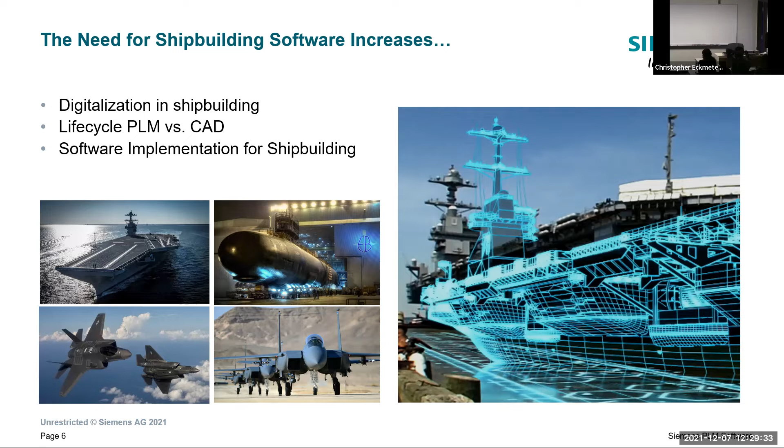So when we talk about digitalization and what's changed, as we moved from a computer-aided design world into life cycle digitalization, the amount of data, and you see it every day, the amount of data available to you and that exists around the things that you use every day has grown exponentially beyond comprehension. So your car is collecting data, your phone is collecting data about you. Everything you do now is collected as data that's in the cloud somewhere and available to process. You have to know what you're looking for and you have to know what to do with it.

So that's where digitalization comes in for shipbuilders and for the Navy and for our other Department of Defense customers. That's what they're looking for, an intelligent way to collect and analyze that data so they know what to do with it and can make good decisions.

So starting with the basics of how we approach this process for shipbuilding specifically. What I pointed out earlier is the benefit of a naval architecture view of the world: the degree you get crosses disciplines, it crosses every aspect of engineering. Everything you can do in engineering is covered in naval architecture, which is the interesting thing about it. You can kind of go in any direction and you're prepared for anything coming out of those doors.

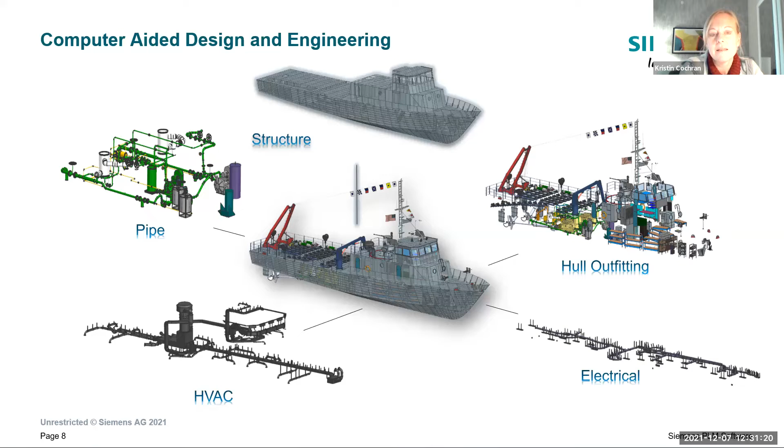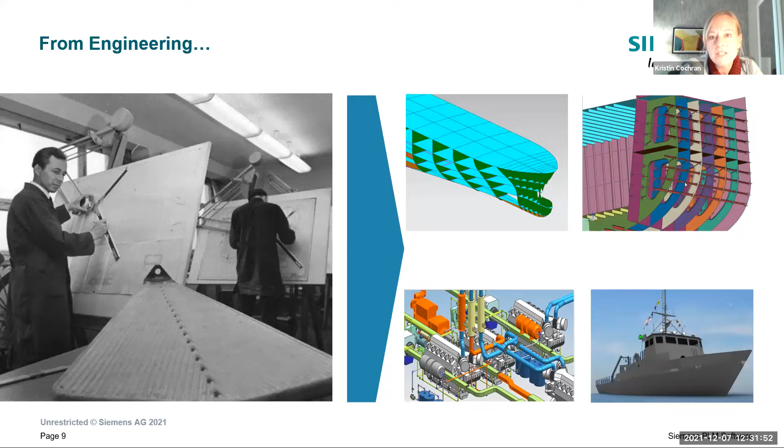But if we start with just looking at the shipbuilding process and design process that we go through, we start with some basic modeling and design and bringing together the discipline and systems into a ship design. And that starts with just the general engineering process that used to be done on a drafting board and now is done in a computer system, a software application. Everything from the shell expansion, the scantling drawings, all the hydrodynamic, hydrostatic calculations, all that's done by computer digitally now. All the design for the systems, model-based systems engineering, all that is done using those basic design capabilities.

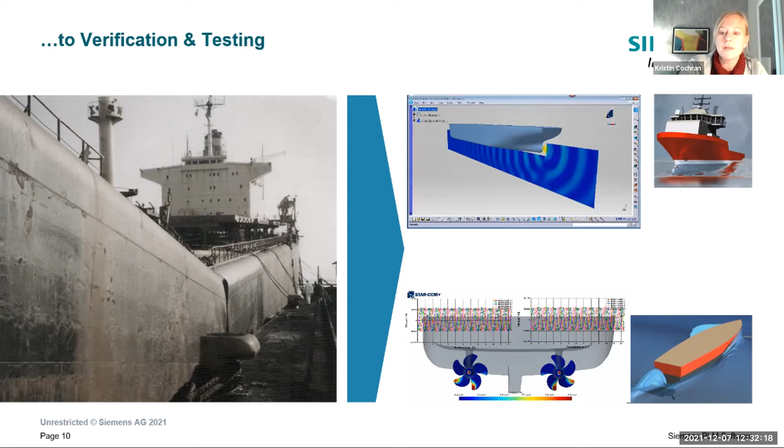And what that allows you to do, having those models, is give you the ability to simulate and assess before you ever build or model or do any kind of tank testing. You can simulate all that via digital technology now, and verify that your design is optimized the way you want it to be. And again, you're optimizing, you're simulating, you're bringing together your design to not only consider the ship you're building now, but the class of ships, and also taking information from the ship that's at sea now off of sensors and Internet of Things type technology that feeds analysis data back into the design process so that you can make design changes for future ships.

And you'll see some of the industry needs driving that now. Business drivers are things like sustainability, environmental regulations and considerations. A lot of the ships that are already at sea are going to have to be modified to take into account the changes occurring now. So you feed the information from the ships you're sustaining back into the design cycle. You want to capture all that into your product models.

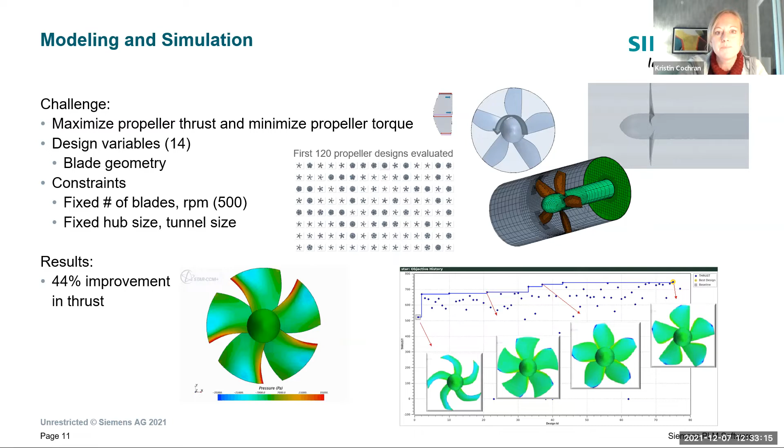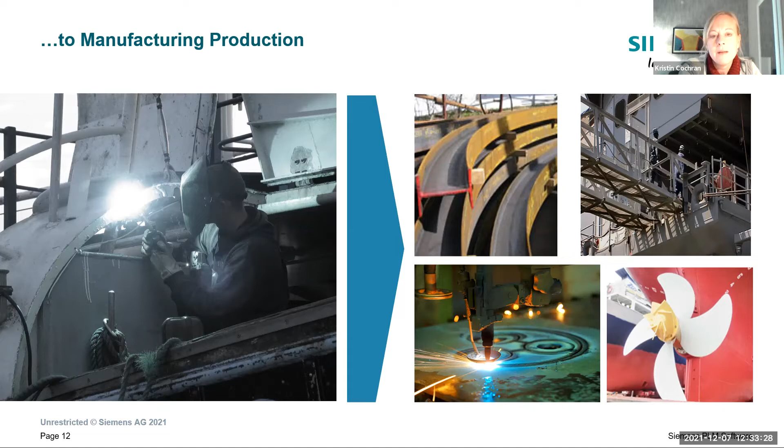So once you've got your design ready, your detailed design, your engineering process is starting to come to completion, then you start thinking about manufacturing and how to break that ship down into how it's going to be built and assembled in production planning. And this is where we kind of have two totally different perspectives: the Navy shipbuilding world versus the commercial shipbuilding world. Shipbuilding in Europe and commercially is very much focused on automation, robotics, designing ships that can be manufactured with as few humans as possible, trying to reduce cost and get the ships done as efficiently and quickly as possible.

And what that means is in a place like Italy, where a cruise shipbuilder may have 10 shipyards at their disposal, you design a block of a ship to perform a certain way once it's built, but that block could be built in any one of the 10 shipyards, all of which may have different crane capabilities, different welding techniques, and different types of production capabilities. So even though the block may be designed to its as-built condition, you have to consider the manufacturing processes that could be done in any one of those places based on schedule or availability and capacity within those yards. So it means producing different deliverables, different outputs, depending on where that ship is going to be built and assembled. So the production process gets pretty complicated, and a lot of analytic algorithms go into calculating the best way to build the ship. Again, all done digitally.

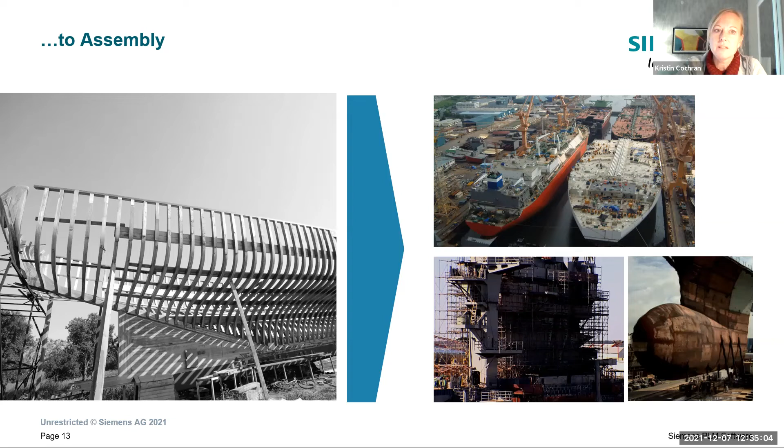So then if you extend that ship into its life cycle, where now the owner operator takes control of the ship, whether that's a cruise ship operator or the Navy, they want data collected off the ship. They want to know the state it's in. They want to be able to update the model with changes that are made along the way, do inspections, and more importantly, do predictive analytics and maintenance planning so they can understand when a part is going to break, when something's going to wear out, and then schedule that maintenance in advance so they can get the ship in and out as quickly as possible. And this is currently a big topic. If you guys are familiar with the U.S.

Navy's infrastructure and optimization work that they're doing, they're revamping the public shipyards and trying to reduce the amount of time a ship or a submarine is in port getting repairs. So, increasing the operational availability, we call it.

So we want to know as much as we can about what repairs the ship is going to need, so that we can plan those availabilities when they come into the shipyard and get them out much more quickly and back into the fleet, so that they're actually out doing the work they're supposed to be doing. So as much as we can, we pull the data off the ship, put it back into the model process, and really make it easier to capture all that digitally and make a decision.

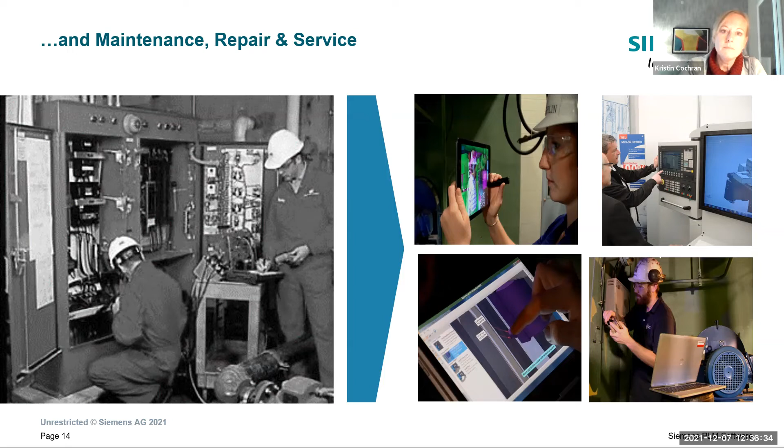So we see the complexity increasing both within the military applications and also commercially, as the requirements change, and the commercial world is going to have to adapt to new requirements very quickly. On the Navy side of things, they have to do more work with a smaller fleet and really increase the amount of time a ship is at sea. So that means having as much data available at hand for as long as that life cycle as we can.

So if you look at the Ford-class aircraft carrier that's being built right now at Newport News, those are 3D modeled ships that they're able to produce without drawings. So all the production process is happening now with electronic work instructions that are telling the workers what to do without having to interpret the jobs off a drawing.

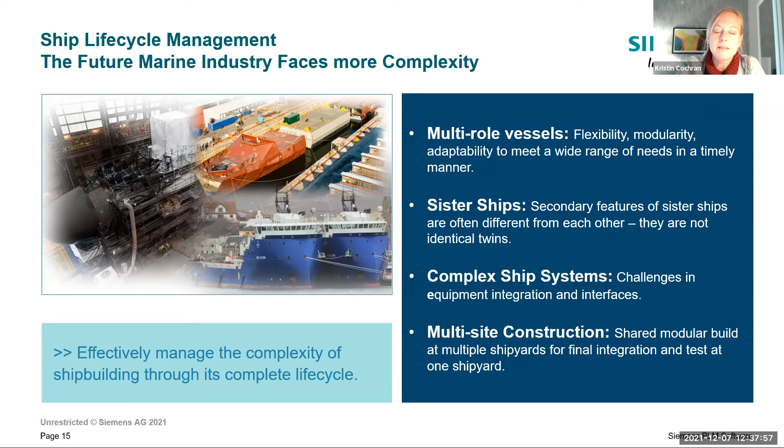So there's a lot of changes coming in terms of both the requirements for digitalization, but also with the data available to a much younger workforce who isn't schooled for decades in the process of reading and interpreting drawings. So a lot is changing, and will continue to change as more of this data and digitalization is available to the yards.

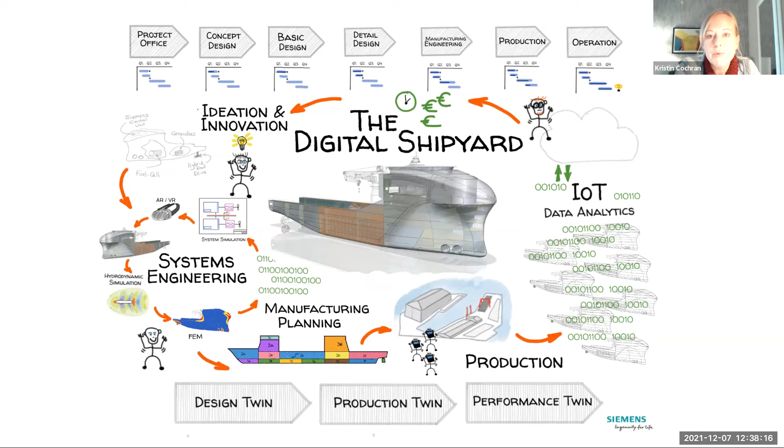So when we think about the digital shipyard and that life cycle that is processed from the acquisition process and contracts and requirements all the way down to what gets handed over to the owner operator as production deliverables, we have to capture all that data in a single place, which we call the product lifecycle management backbone. So for us, that's really the transition away from just the 3D CAD model into capturing every bit of data across the life cycle of a ship all in one place.

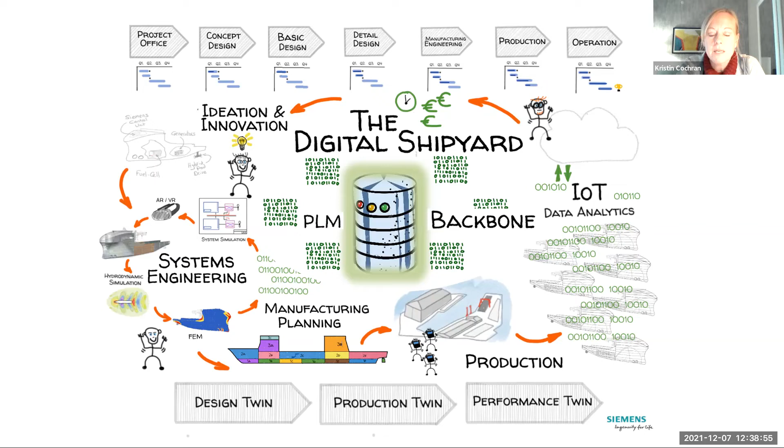So that can be anything from simulation data to potential analytics data that you're pulling off a sensor as the ship's at sea, that everything needs to be stored in one place in order to really make good decisions and keep track of everything. So you'll hear the term digital twin, digital thread. So those are kind of the latest buzzwords.

But what they mean is a digital thread, it captures information about a ship throughout its life cycle. It's not really a snapshot in time of data along the way. It's actually gathering all of that data together in one place. So your ship is going to look different as designed and as built and at sea, because 20 years into sailing at sea, you're going to be having a lot of changes made that make it look quite different than how it was designed.

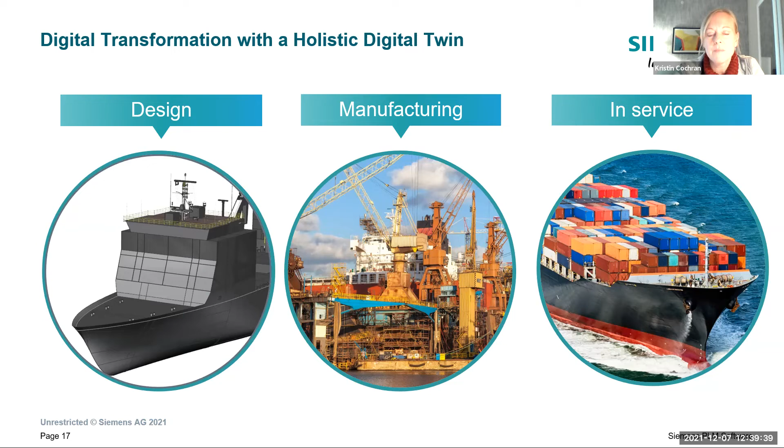Especially when you think about swapping out weapon systems, crew capability and needs, things that change over the life cycle of a ship make it look a lot different than when it was built and delivered in the first place. So capturing all of that information in one place is what drives a digital twin and gives you the complete picture of that ship's entire life. And by the way, extending not just to a ship, but to a class of ships, which all have variations in slightly different designs.

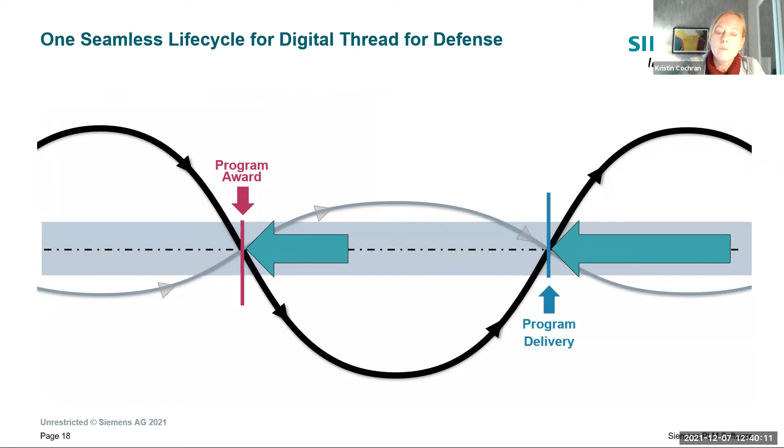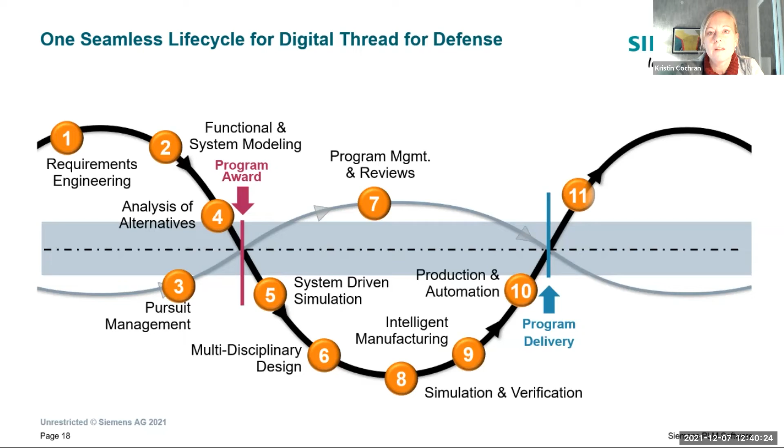So when you hear the term digital thread, what that means for us is that digital twin, and then the processes and data that are applied to that digital twin along the path of its life cycle. So what this life cycle is showing you is how the data kind of transfers across each process that occurs, but also different parties are going to be interested in different parts of this thread.

So for example, if you're building a ship for the Navy, upfront on the acquisition side of things, the Navy is defining the requirements. The Navy's looking at design alternatives. They're assessing weapon system requirements. They're assessing what they need to acquire and setting the requirements for an OEM that's going to actually build the ship.

So the OEM is responsible for the design process and driving out the data to meet those requirements. But then in the end, that same product is going to be handed back over to the Navy to run it, operate it and maintain it for the life cycle. So that same information gets passed back and forth between the Navy and the OEM at different points along the way. And in the meantime, everyone's looking at the same view of the data along the life cycle too. So it's all in one place. And that's where that PLM backbone comes in.

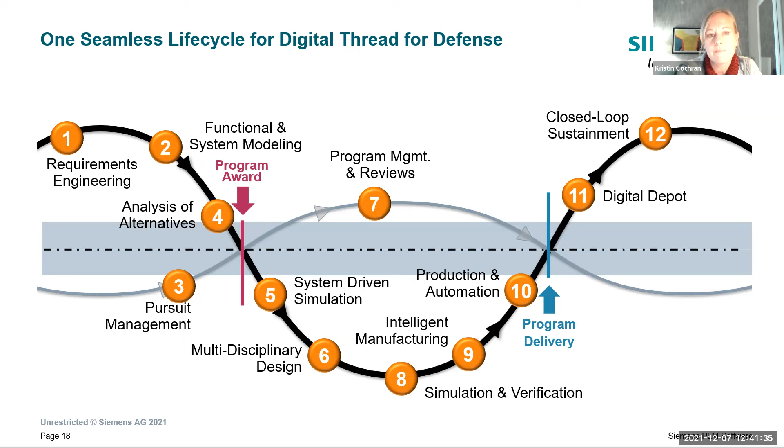So talking a little bit about requirements, because I think this is a particular area that's changing rapidly because of new considerations and regulations that are required for ships that are going out to sea now commercially. There's a lot more emphasis on requirements verification and validation upfront in the design process, and just ensuring that requirements continue to be met. And as requirements are changing, that information is getting driven back in to identify potential changes that may be needed. So a lot of focus on capturing requirements upfront and then validating to those requirements as you go.

So where we see the PLM system sitting, and here again, I'm differentiating between the CAD design, which is like the 3D model of the ship, versus the backbone of information that kind of surrounds that model and is going to be used to sustain that life cycle. And the product lifecycle management is where you capture effectivity.

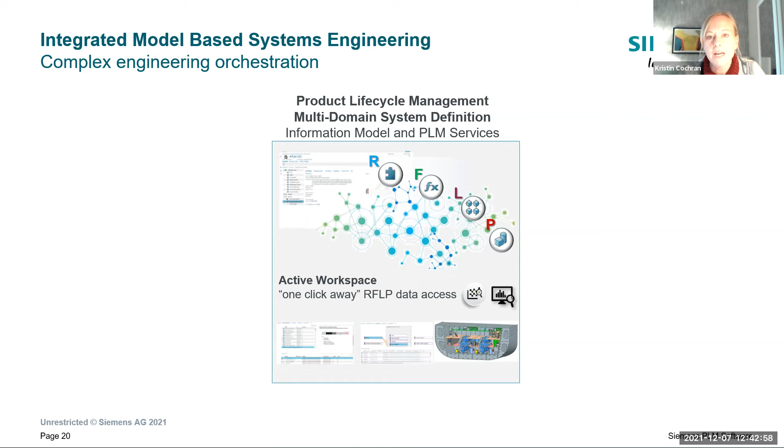So if you're building 5 ships in a class and each one of them has small variations, you don't want to copy that model and maintain it 5 times in the CAD system. You want to just identify what's changing on each of the 5 ships. It saves a tremendous amount of engineering time and also allows you to make a change once and propagate it through the different ships of the class. So that's where the PLM system comes in.

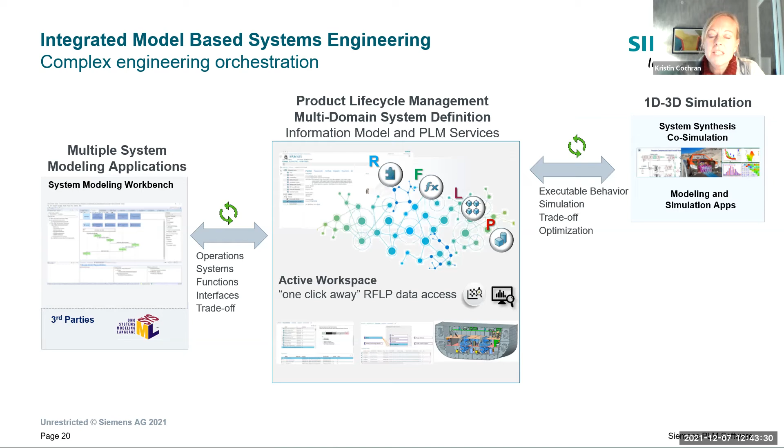So that is also going to be kind of the backbone or the tracker of all the information that goes along with that ship. So things like model-based systems engineering, analytics and requirements for the simulation processes that go on to that ship before it's built. All the information you're using to optimize the design and verify that you're meeting the requirements in the best possible way, that can all get tracked and stored in one place.

So when we think about ship design and the different disciplines that come into that, so structure, piping, outfitting, electrical is a key one, but not even so much the cable systems that span the length of the ship. But think about now the chipset designs that go into making the ship electronics function, weapon systems. Those chips, similar to what would be in your car now, are constantly changing and updating and capturing upgrades and changes along the way. So that design process of chipsets is actually really critical to get into this process as well. So that's where we get away from a traditional 3D model, CAD-based design, and into all the different design tasks that go on here, capturing data in one place.

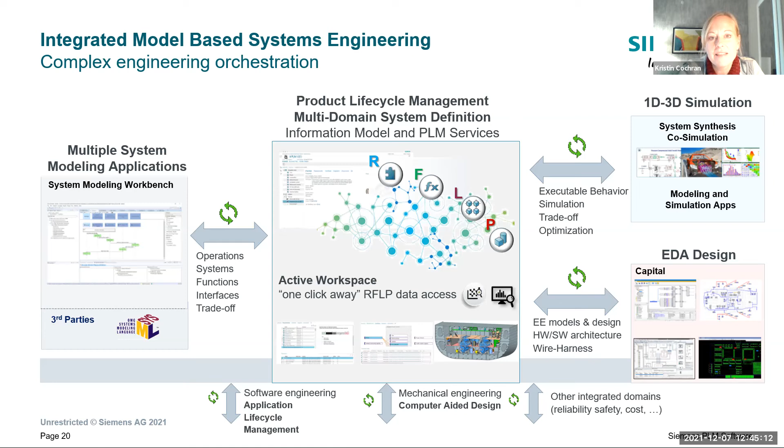So those same chipsets are going to have software to drive them. And that software needs to be configured to work for the particular ship that you're working on. So you want to maintain the changes that occur to that software as well. So that's where an application lifecycle management tool comes in, specifically for software design and implementation. And then finally, you have your CAD. So everything comes together in one place, one single backbone of data. And this is what we term that digital thread, bringing everything together into one place.

So what's kept me busy for the last 24 years is software for the shipbuilding industry is very complex. Same for aircraft design, same for automotive design, but in particular, shipbuilding has the biggest and the most complex models in existence of any product there is. And the amount of system interaction and the way the disciplines need to work together and be optimized in the performance of the ship itself makes it a very challenging environment to work in. So what is expected from the software industry then is applications that are purpose built for shipbuilding and function for that industry specifically. So you don't just take an AutoCAD and figure out how to model some 3D parts.

It has to be actually purpose built for the shipbuilding industry. So highly configurable, just because every single shipyard does things differently, especially in the production practices and how they build the ship. And you have to be able to configure to that business process. Typically, a shipyard has been, some of them have been around for 100, 150 years, and their business processes are driven by environmental and geography concerns, where the shipyard's located, what kind of workforce they have, what kind of manufacturing capabilities they have. All those things are configurable or have to be built into that design tool that you use to drive out the design.

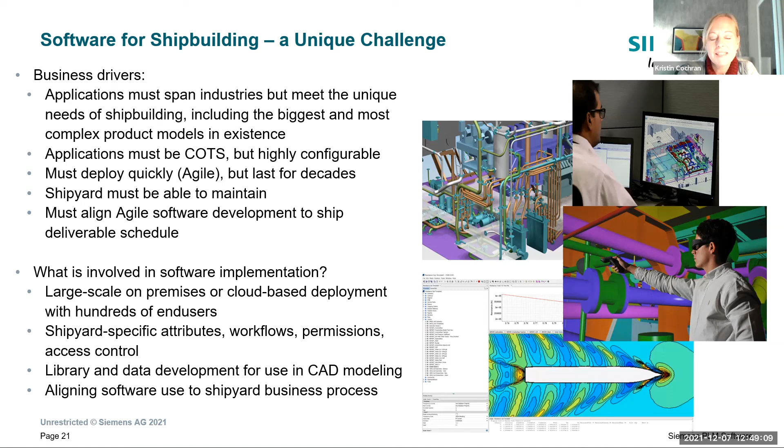Okay, so here's a question from the back. So obviously, if a lot of this stuff started in the last 20 years or so, you must be importing things from like decades before that. So say you come across a Navy combatant that's been out at sea for 4 decades. How do you get started on that, since everything, of course, would have been entirely on paper if it even existed at all? Yeah, and in fact, it's a good point. And in fact, there's not even paper for a lot of that, because the decisions are made in the yard. We're welding this to that.

Yeah, so the starting point for most operations today, for repair operations and maintenance, is actually scan data. So taking a laser scanner out into the field or into the yard and scanning what you have there as a base. And then that scan data could actually be imported into a 3D model, and then you can make your modifications and your changes from that starting point. So the scan data has come a long way. It used to be real faceted and real difficult to interpret and work with, but now it's come to the point where they can basically render those scanned models pretty accurately, to the point where you can pull dimensions and measurements off of them and use that data.